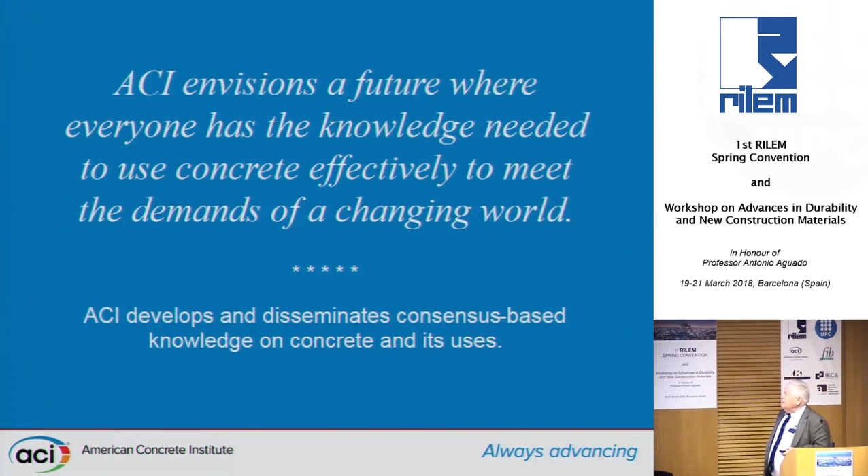They have this vision where they want people to have a better understanding of concrete and disseminate that knowledge. ACI is a fairly large organization. They've taken a number of initiatives, some of these things recently. They've been pushing things like webinars. They do certification programs - they've certified over 400,000 people and workers for quality construction, finishers and testing agencies. They run a university program through webinars and seminars.

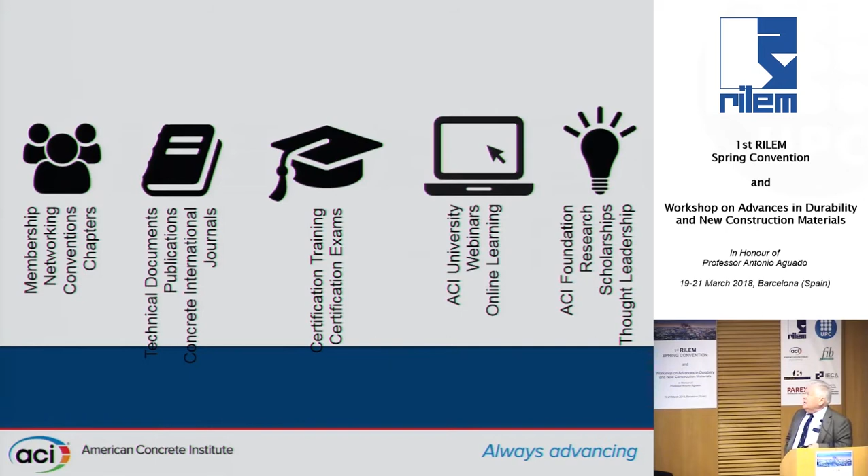They have 2 conventions a year. Our convention's in Salt Lake City next week, so I'll go home from here and then right to Salt Lake. They have a research foundation that distributes money - they've increased the research money they're distributing, and people can apply once a year for funding. There's over 20,000 members from 129 countries, and they've just opened an office in the Middle East, so they're going to have a physical presence there. Our current president is from Lebanon, so it's a fairly large organization, fairly international.

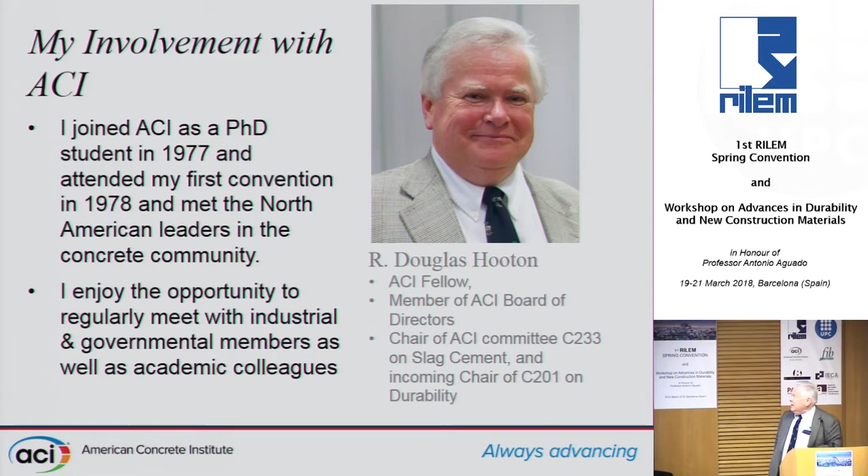Although it's North American-centric, it certainly has that. I've been a member for a long time - I can tell by my gray hair. I'm on the board of directors currently, and I'm just coming on as chairman of the Durability Committee, developing a new initiative on durability specifications. So it's been a rewarding experience being part of ACI. That's my ACI spiel.

But now this is what I want to talk about - I guess it didn't make the program, I thought I'd sent the abstract in. This is sulfate resistance, related to recent developments with interground limestone in cements - not new in Europe, but relatively new in North America. We were concerned about potential for Thaumasite sulfate attack, and we instituted a test method in the Canadian standards, which we've now removed - we maybe overthought the problem a bit.

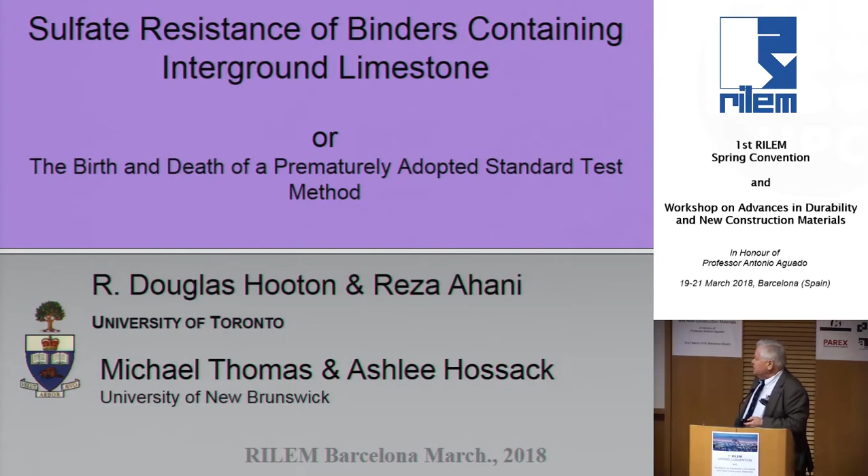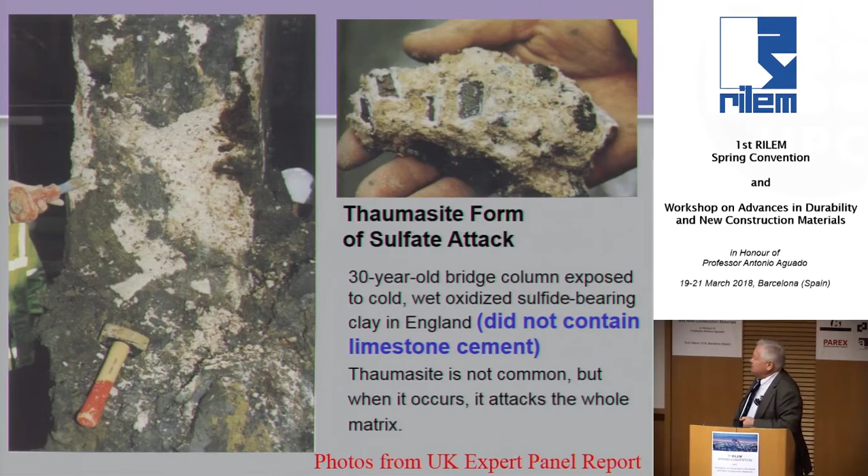This was presented with my PhD student Reza Ahani and Michael Thomas at the University of New Brunswick, his former PhD student. People are aware of the Thaumasite issue, potential for pretty extreme damage because it attacks the calcium silicate matrix of concrete. Although this concrete didn't contain limestone cement, it formed probably due to the CO2 in the groundwater.

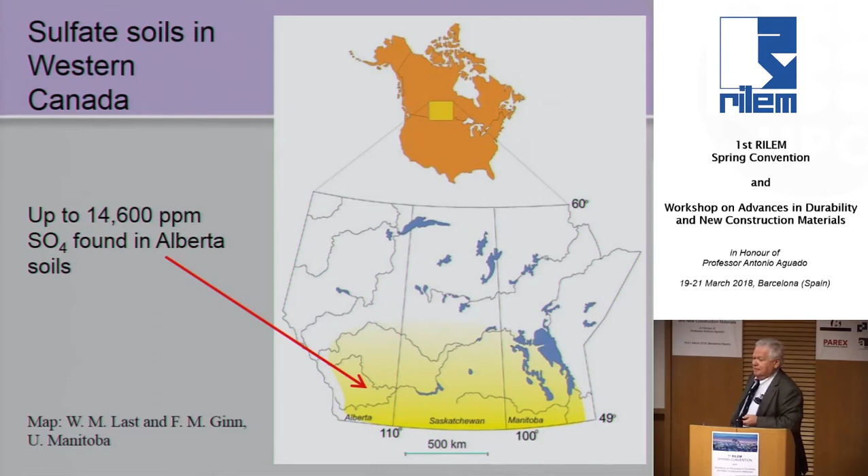We have a severe sulfate issue in western North America - just a little box in western Canada where we have very high sulfates in ancient seabed. We get concentrations higher than you'd find in most places in Europe. People think we have crazy high sulfate content test methods where we put samples up to 33,000 parts per million sulfate ions. But in the States, just below that map, they have concentrations that actually get that high in the field. So we have very high concentrations in Western Canada that we have to deal with.

As a result, our specifications for sulfate attack are very similar in Canada and the US. We have basically a simplified program, less complex than the EN standards for sulfates - just 3 categories of different severities. As it gets more severe, we decrease the water-cement ratio. We have requirements for moderate sulfate-resistant or high sulfate-resistant cements, and we can qualify mixtures of blended cements, or mixtures of SCMs (supplementary cementitious materials) and Portland cement, by using a mortar bar expansion test. So we have this option.

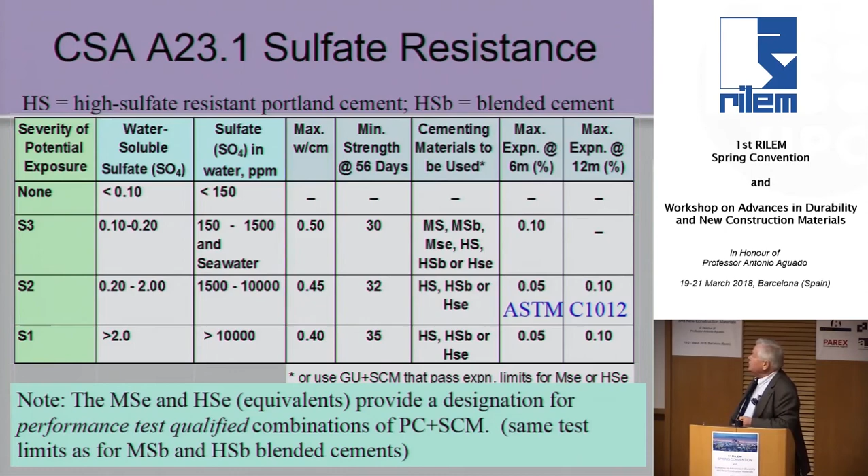That's been working for us and pretty much solved problems, except when we introduced limestone about 10 years ago into the Canadian standard with up to 15% interground limestone - similar to a CEM 2A, CEM 2AL in the EN standards.

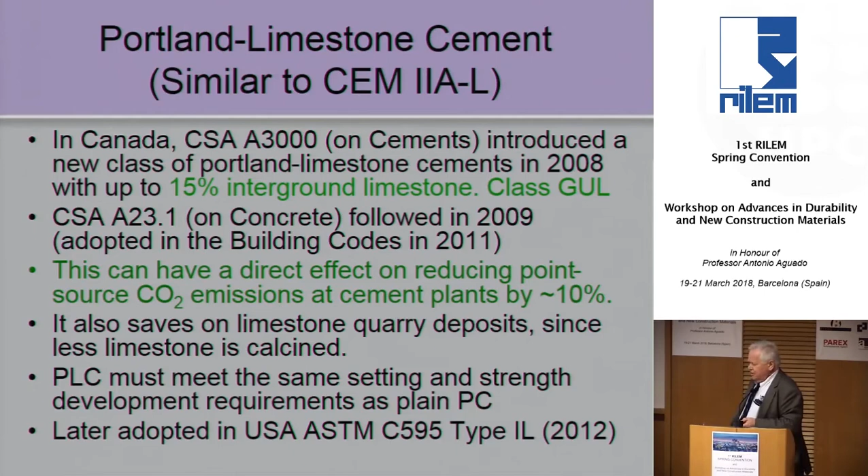There were a lot of reasons for doing that, and of course the cement industry in North America is largely European owned - you've got Holcim Lafarge, Heidelberg Cement - and they had interest in bringing this technology into North America, using Canada as their first stop. It's now moved into the United States through ASTM more recently, but we adopted this first, and we designed these cements to have the same strength development, setting time and strength development properties as regular Portland cement.

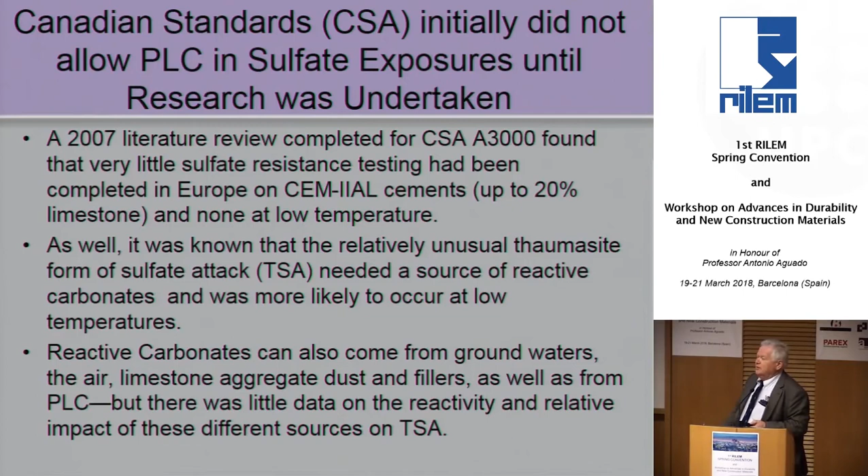When this came in, there were concerns amongst the committee members about various things, and we looked at sulfate attack as one potential area where there hadn't been a lot of research done on the effect of limestone cements in sulfate environments, especially because of the concern at the time with Thaumasite sulfate attack, which involves carbonates, low temperatures, and sulfate ions. So we wanted to make sure we did some research before we allowed these cements in sulfate exposures.

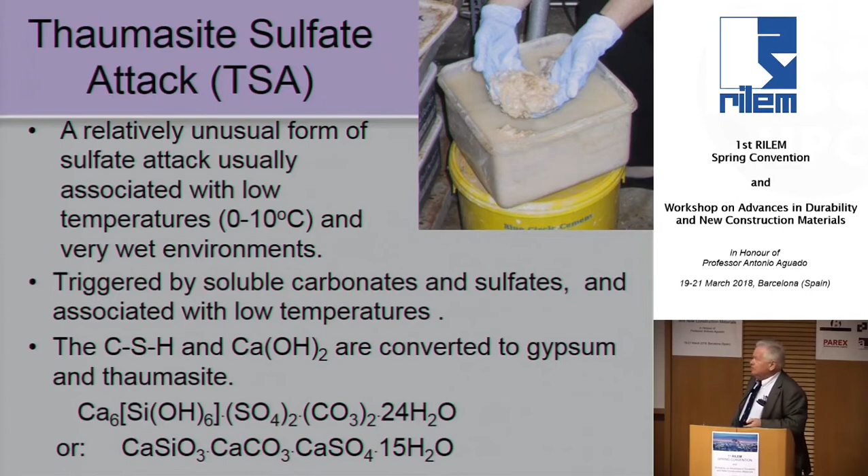Our normal test method is the ASTM C1012 test. I know it's been criticized for maybe not representing all things, and I know Esperanza's been involved with the Rilem committee on developing a better test method for the European experience or world experience. But we've had this test method since around 1981.

You cast mortar bars, you wait till they get to 20 megapascal strength, you put them in a pretty strong sulfate solution, and you immerse them and measure the expansion. But at room temperature, you're not going to pick up Thaumasite. It will form ettringite typically and cause that swelling.

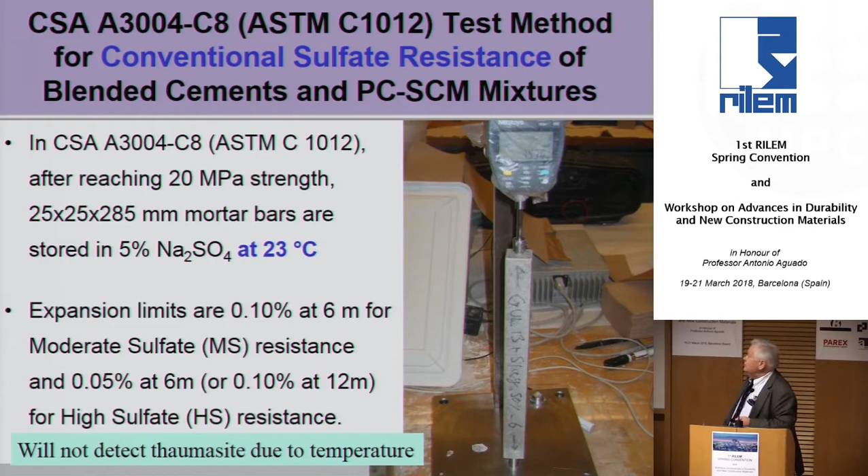But with Thaumasite, we're thinking, well, what do we do about this? So we developed another mortar bar test at cold temperature. We put them at 5 degrees, basically the same test method, but storing them at a lower temperature.

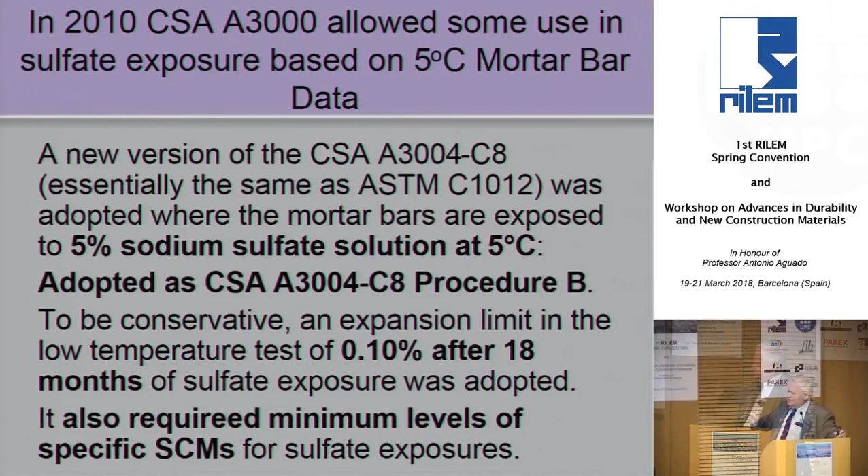And so we adopted this as a way of moving forward to allow the use of limestone cements with supplementary cementitious materials or blended systems in the sulfate environment. This was in 2010, so two years later, we came up with this based on mortar bar testing.

That's the test method - it's exactly the same test method except for the temperature. And of course, one of the problems with that is that at 20 megapascals, which you typically get within 1 or 2 days, a lot of things like fly ashes haven't done anything.

They haven't done any pozzolanic reaction in 2 days. Then you put them at 5 degrees C and put them to sleep. So the problem with that is it made the pozzolans look very poor in the system. With slag, it wasn't so bad because slag tends to react more quickly, and silica fume as well. The low temperature doesn't hurt those, but certainly fly ashes were impacted adversely by this cold temperature.

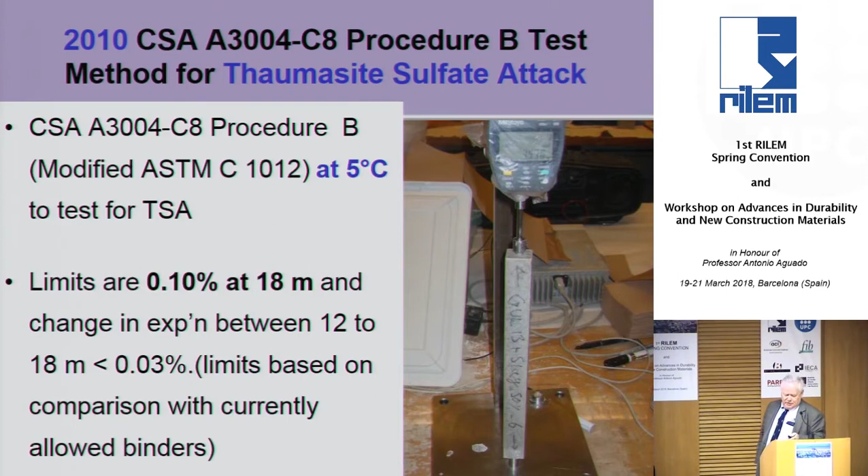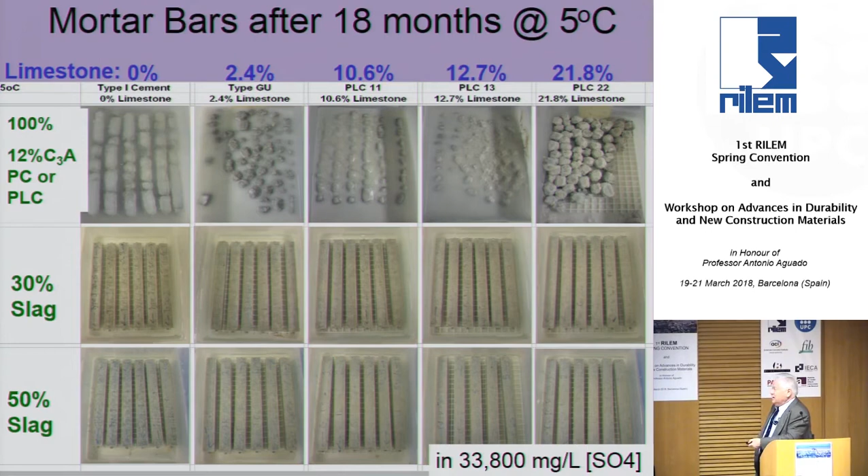Some of this has to do with Thaumasite, although as we found later, it happens after the fact. And if you put slag in, you don't have any problem after 18 months.

We did X-ray diffraction, amongst other things, and what we found was at 23 degrees - with different amounts of limestone - we see ettringite, gypsum, portlandite, but at the low temperature we also see the doublets related to Thaumasite and ettringite.

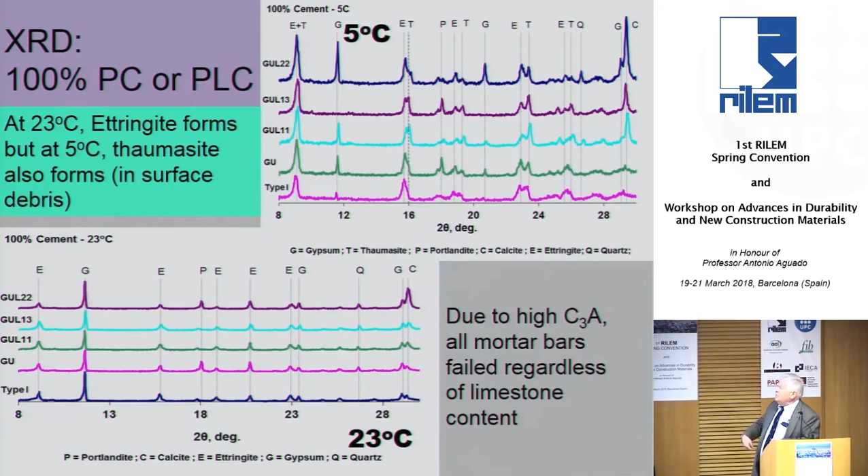So the Thaumasite does form at the low temperature in the debris, not so much in the intact bar, but in the debris that forms in the bottom after the fact. As we found later, the ettringite forms first, the failure occurs by ettringite, and then with prolonged exposure of the small bits of debris, Thaumasite forms as a secondary reaction.

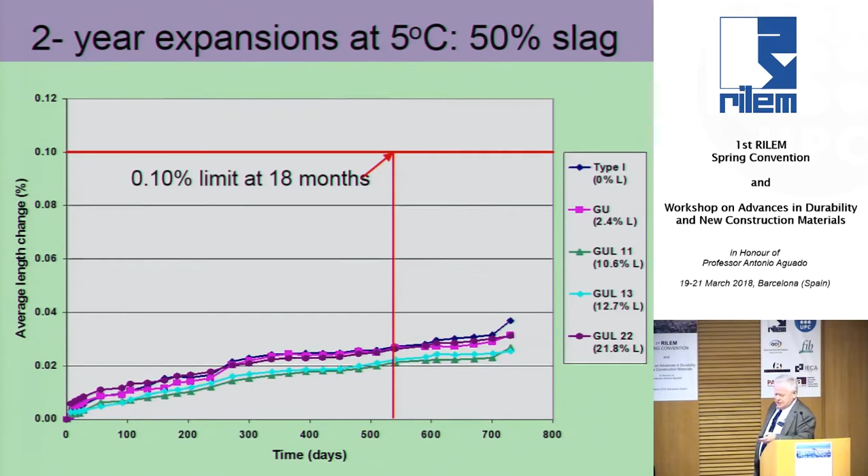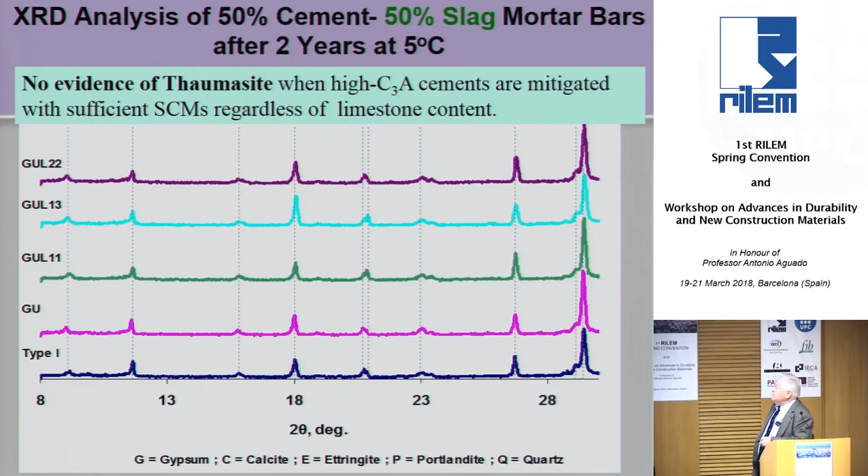Again, this is the sort of expansion we would see if you have sufficient replacement with slag. Our expansion limit is the red line here, but our expansions, regardless of limestone content, are essentially the same. When we have 50% slag in there, expansion is totally mitigated - again it doesn't matter how much limestone - and we're not seeing any evidence of Thaumasite formation.

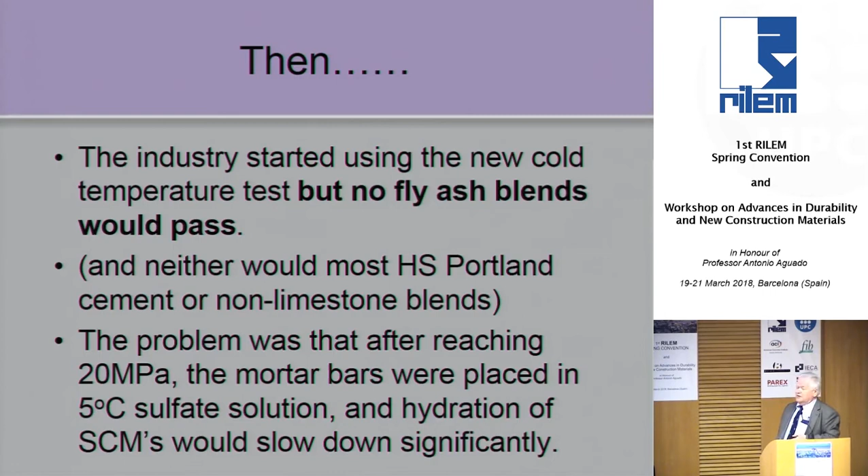As I said, this test method we put in 2010 caused all kinds of problems in the industry when they started using it, because many in the western areas where the high sulfates are don't have slag, they have fly ash. And of course the test method didn't show that to work very well. So we said, well, are we really simulating concrete performance?

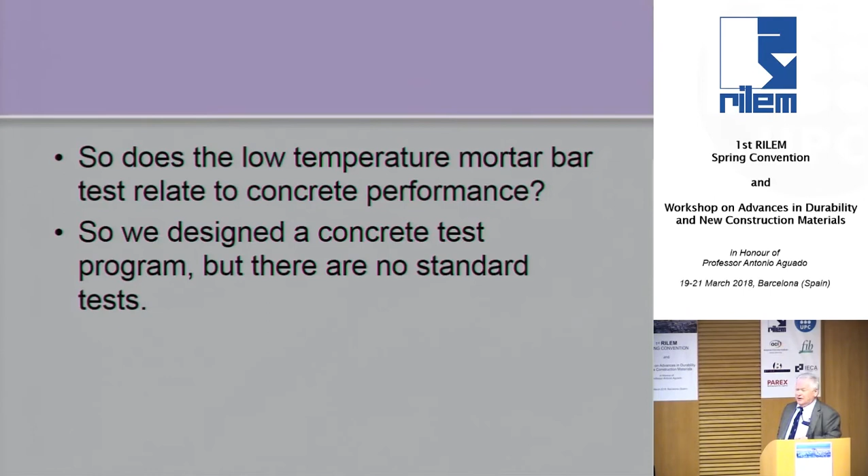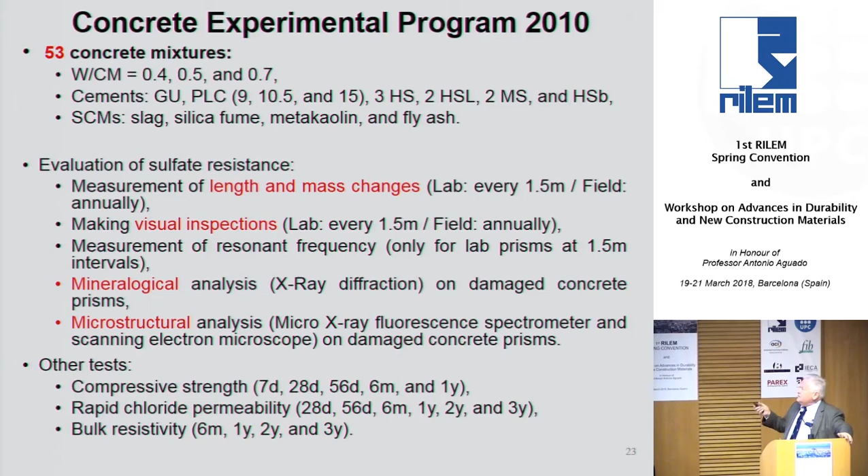So we started doing concrete testing. In 2010 we embarked on a couple of concrete programs, fairly large programs. I did it in Toronto, and Michael Thomas did that at the University of New Brunswick. We did different mixtures, but at Toronto I did 53 different types of concrete of different water binder ratios, different cement types, and different supplementary cementitious materials. We looked at, and did, visual inspections, mineralogical analysis, microstructural analysis, and length change, along with other tests.

We did some in the laboratory at 5 degrees Celsius, where we stored concrete prisms in containers in various solutions of either mag sulfate, sodium sulfate, or calcium hydroxide as a baseline, and we used different concentrations depending on the water binder ratio.

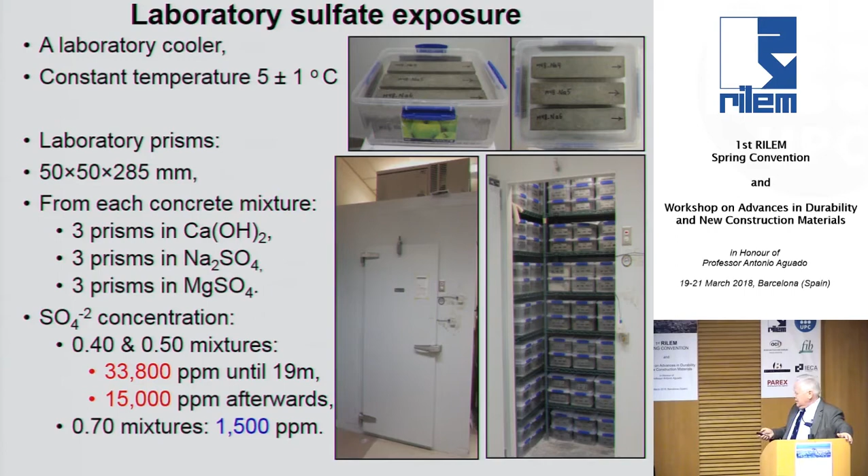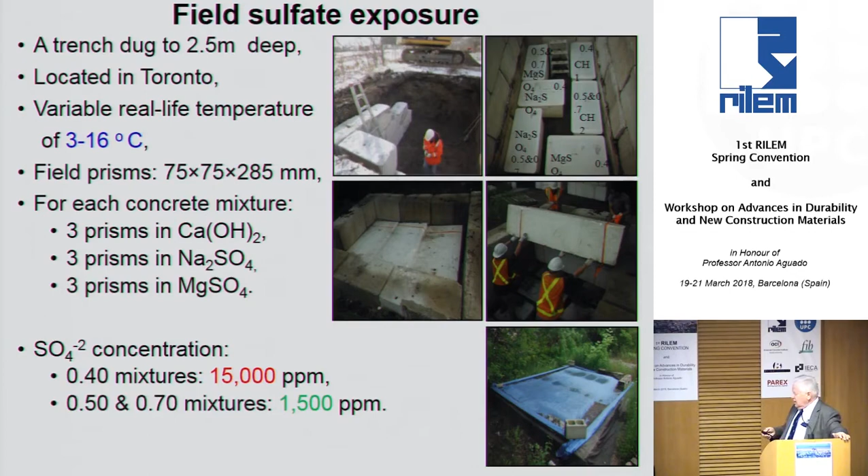And we also did a field site. We don't have sulfate soils in Toronto, so we decided to create an underground site in tanks that would allow us to simulate the temperatures that occur in foundations, where we might have cool temperature attack. We did various concentrations, and the one we picked was 15,000 milligrams per liter, or 15 grams per liter of sulfate, which represents the condition in Western Canada, sort of the worst case condition. And we would require 0.4 water binder ratio for those situations.

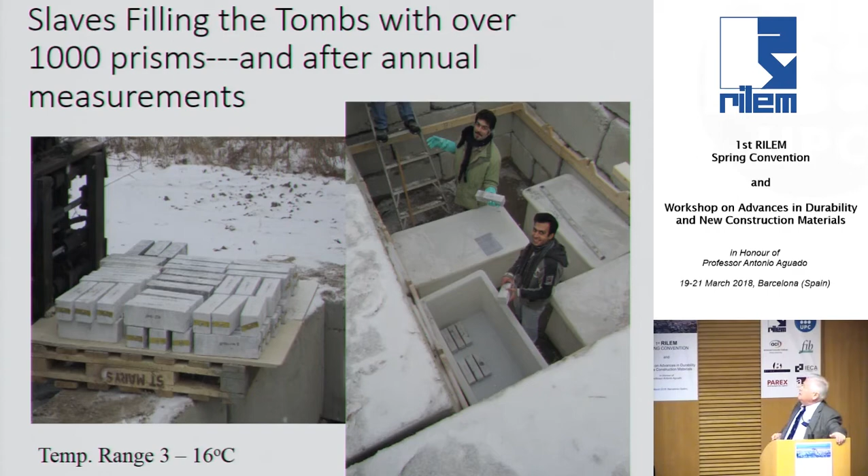Some of my slaves, some people call them graduate students, but I call them slaves - we've got over 1,000 concrete beams that we filled in there. We put them in sulfate. They're covered in insulation. We come back next year, and every year we take them out. They're now over 7 years old now. So I need slaves every summer to come out and put those things in.

And we did some work a little bit after. This is some cements, and what they have. The top here, we have a high C3A cement. We have the same clinker with 9% ground limestone, one with 15% ground limestone. And this is the surface damage after 1.25 years in the field site, where it varies between about 3 degrees and 16 degrees Celsius during the year.

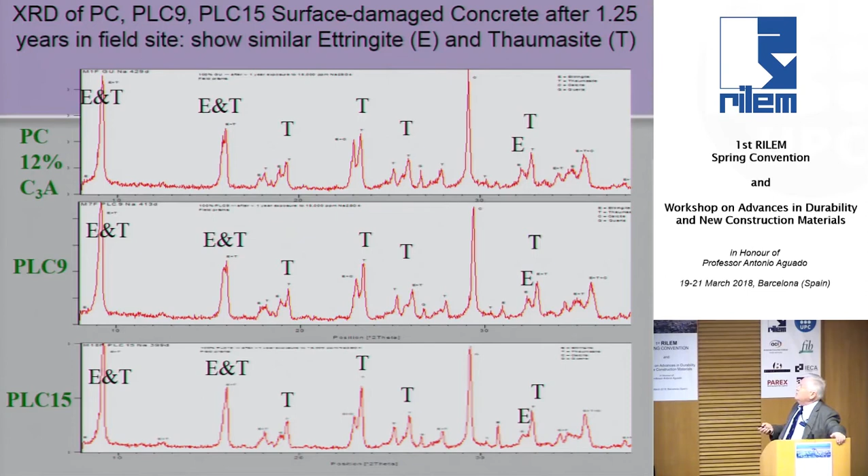And we see, regardless of the limestone, even if there's no limestone in the cement, we're seeing exactly the same thing. We see some evidence of Thaumasite and ettringite, but there's no difference with the limestone content. So it wasn't influencing the result.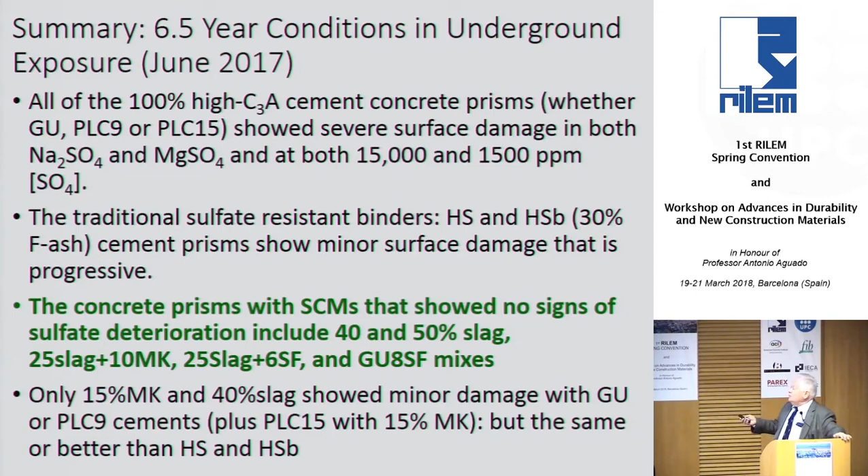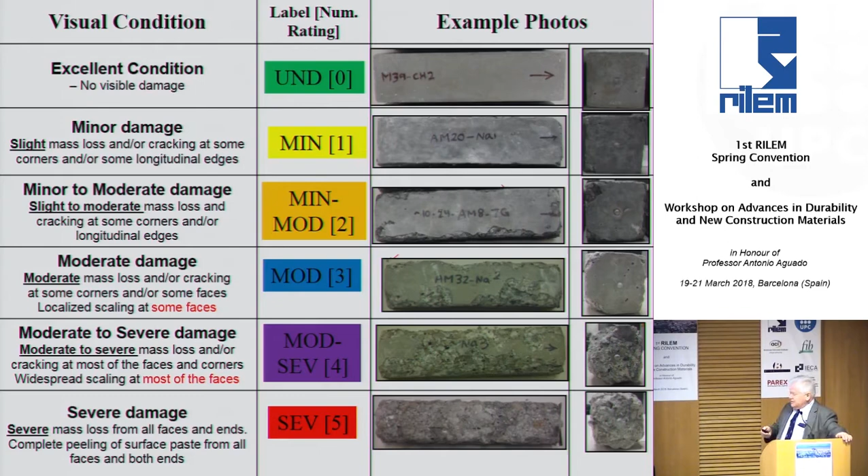And my student developed a color coding system just to make it easier, because they're very small photographs here. So green means there's no damage, red means that they're severely damaged, and the color scale goes on like that. It's just a color scale, because I've just got some composite photos here.

So the top left here is a straight high C3A Portland cement with 40% slag after 5.5 years. There's some minor damage here, just small corner damage. And that's true whether it's limestone or not - there's no difference due to the limestone. If we put enough slag in, 50% slag, which we would normally use with that particular clinker, there is no damage at all. This is a sulfate-resistant cement that's currently allowed in the system.

So a low C3A Portland cement that have been used for almost 100 years in Western Canada, and they're severely damaged in this environment. So after 5.5 years, they're severely damaged, but the mixture of even a high C3A cement with sufficient slag is fine.

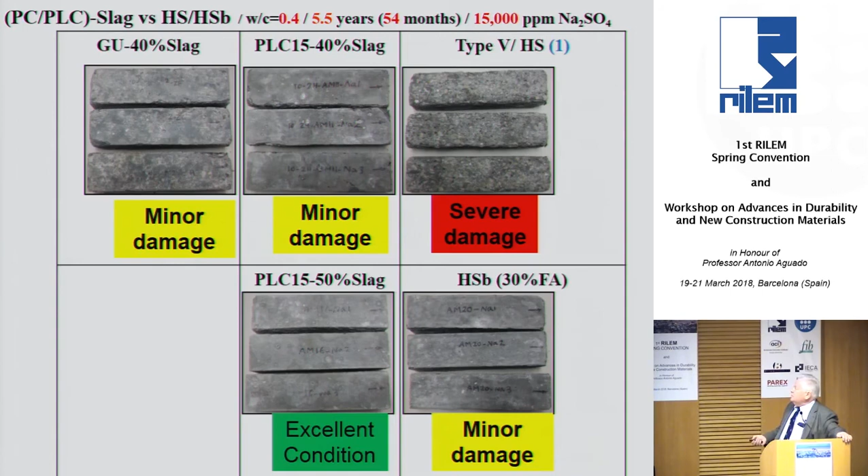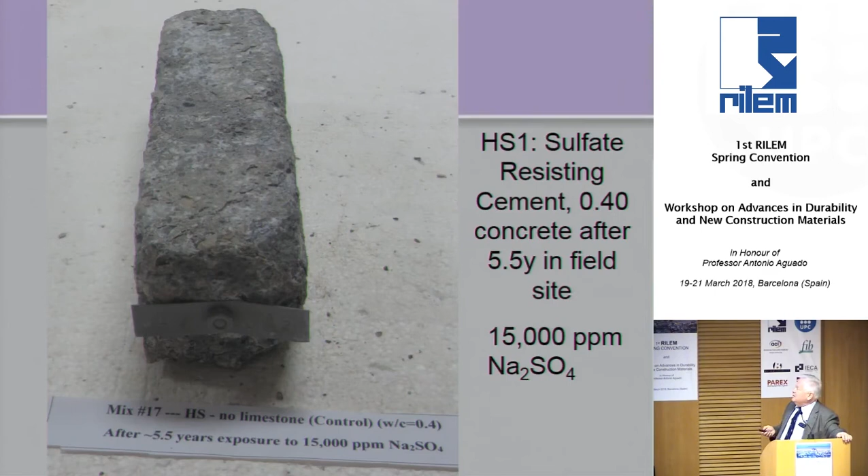And this is another system with 30% fly ash with a moderate C3A clinker that's also sold in Western Canada for sulfate environments. So we're seeing there's no difference. That's a high sulfate-resistant Portland cement after 5.5 years to see just a more close-up of the damage that occurs.

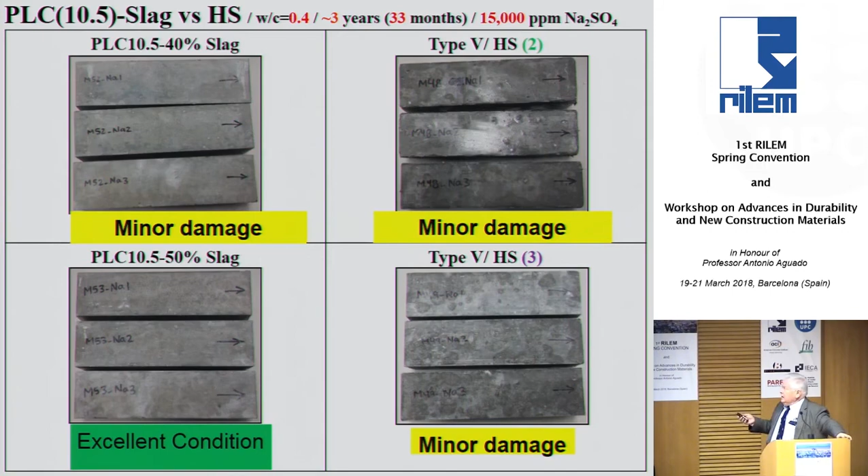There's a different Portland limestone cement with about 11%, 10.5% limestone, again with 40% slag or 50% slag. Two different sulfate-resistant Portland cements. We decided to expand the program in 2012. And again, there's no difference with the limestone sufficiently mitigated. They're no worse, if in fact better than what they're doing now.

And this is just in different solutions. So the top bar is sodium sulfate, the magnesium sulfate, sodium, magnesium of different systems. So again, the limestone's not having any impact in terms of - they're in better shape than what people are doing now in the industry.

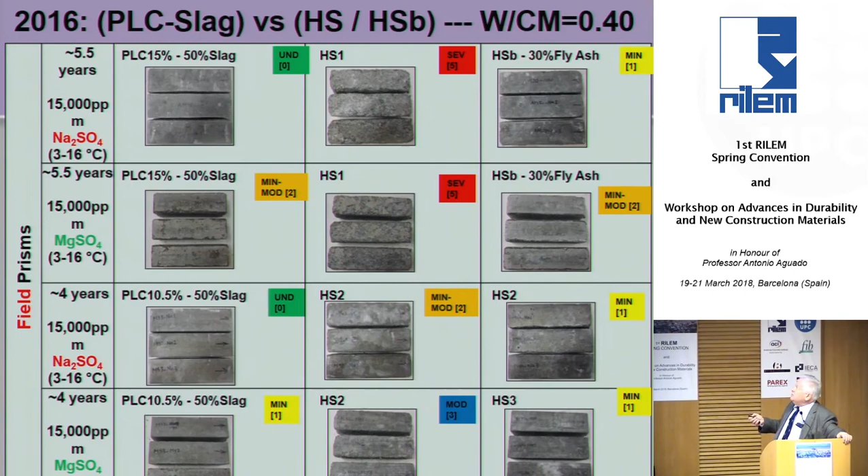We did some microstructural work, which I won't show all of due to time. We did X-ray diffraction and SEM work and found no evidence of Thaumasite sulfate attack inside the concrete. We made thin sections and did X-ray microfluorescence to look at sulfate penetration from the surface, then examined these in the electron microscope. Whether using limestone or straight Portland cement with or without slag, a 15% limestone with or without slag, or sulfate-resistant Portland cement, it didn't have much impact on the rate of penetration, and we never saw any Thaumasite inside the sample. The only time we saw Thaumasite was when pieces fell off the surface and further deteriorated in the structure.

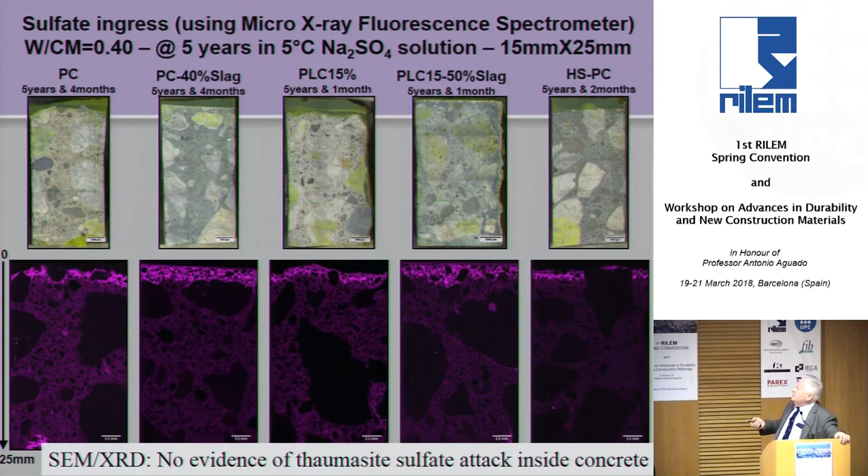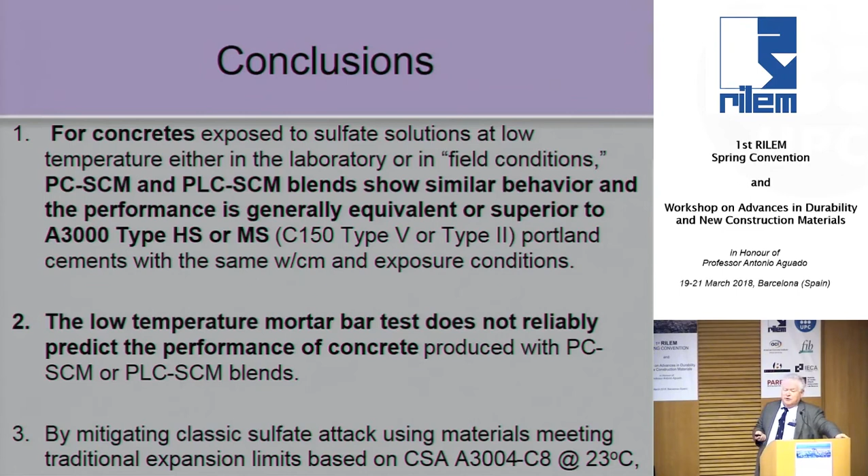To conclude: concrete exposed to sulfates at either cold temperatures or mixed temperatures, cycling between 3 and 16 degrees Celsius, showed that with sufficient mitigation using supplementary materials or blended cements, we got equivalent or superior performance to sulfate-resistant systems currently used. The mortar bar test we'd originally developed wasn't very reliable in predicting concrete performance.

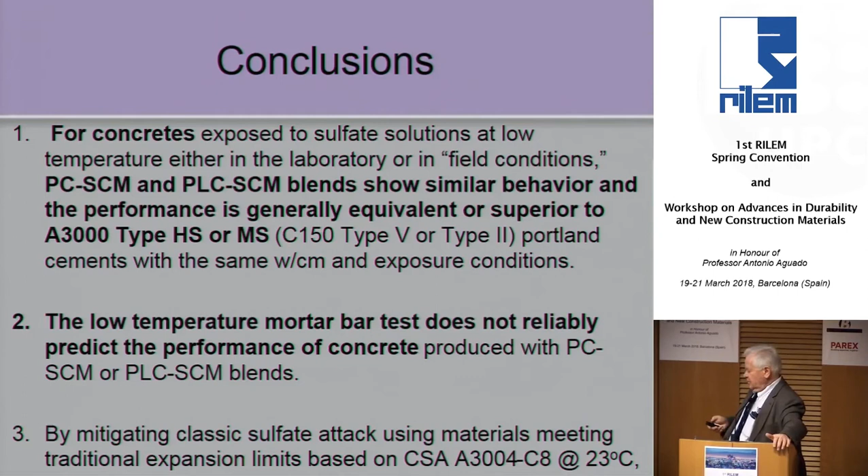We found that the traditional mortar bar test, the CSA A3004-C8 test, at room temperature was sufficient for telling us whether a system is mitigated or not, because if you mitigate for ettringite, you also mitigate for Thaumasite. So the test was too aggressive, and last year we removed that test method from our standards, which had been there since 2010, and we've now removed all restrictions on the use of limestone cements in sulfate exposures.

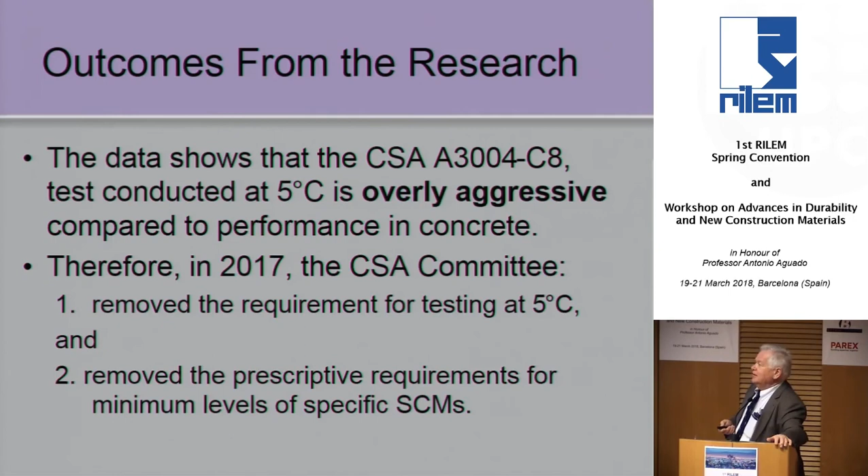ASTM has copied that as well, though they didn't adopt any of these measures themselves. They waited to see what we were doing in Canada. We were the test bed for the Americans.

We published some of this report. Mike Thomas and I published this, and you can download it for free from the web, from the Portland Cement Association, who were of course interested in our research. It contains the recommendations we found and a lot of the data we developed for this program. It was a long program, but it's probably the most research ever done on sulfate resistance in North America to approve a cement system.

But it was a very interesting experience. Thank you very much, I appreciate the opportunity.

Thank you very much, Doug. Maybe don't go too far because maybe we have time for one question. Quiet, no questions? So this... Oh, Mark, you have a question.

Doug, I understand why you removed the test method, but you didn't quite explain why you were doing prescriptive requirements. Can you replace them with some performance requirements?

We had some prescriptive requirements. When we first did this, people in the Western Canada ready-mix industry were very nervous about allowing this type of cement in exposures where they knew they had severe sulfate problems. If they don't address sulfate resistance there, the concrete doesn't last 5 years. So they were nervous about bringing in a new cement system. We took a belt and suspenders approach: we put in a test we thought was a performance test, and we put in prescriptive limits so nobody could get around it, requiring sufficient fly ash or slag to mitigate the problem as well.

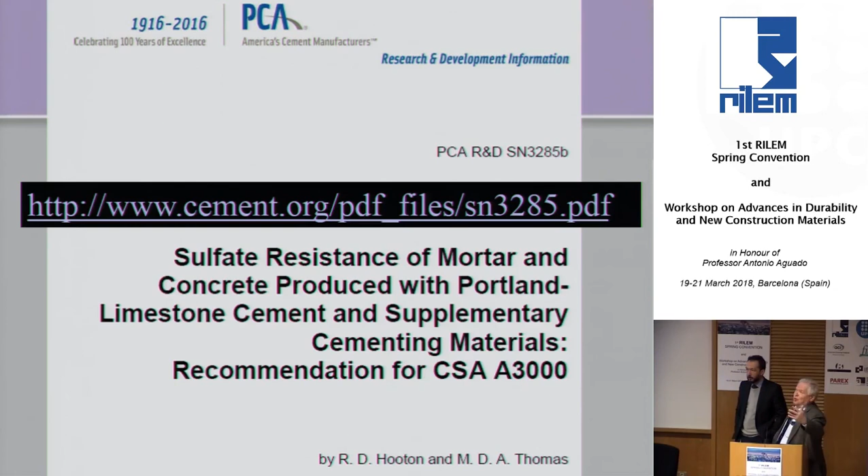But then we found that the regular test method would give us that same performance, so we didn't see the need for that additional prescriptive requirement in the system. It's sort of self-regulating — if you have data showing it doesn't expand in the mortar bar test, you have sufficient mitigation. It was really just a nervousness issue, and I think because of this research program we've calmed down the industry, and I feel more comfortable with it.

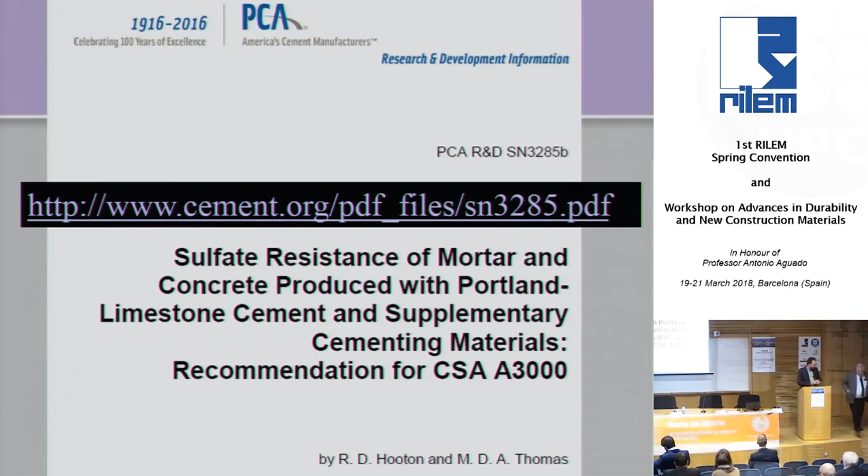All right, thank you very much once again, Doug.